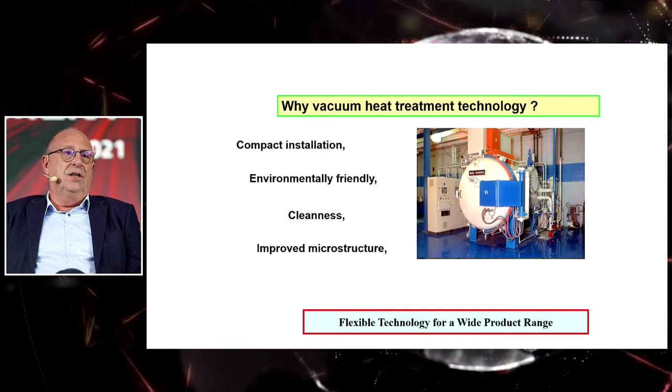First, let me try to answer why vacuum heat treatment technology generally. Everyone knows today that vacuum technology offers compact installation, is environmentally friendly, and offers cleanness and improved microstructures. So vacuum technology is generally a good technology for a wide product range. An important part of modern vacuum technology is vacuum or low pressure carburizing. Seco/Warwick developed this technology together with our research team for a long time, maybe the last 20 years or more.

So what is the basic difference between traditional gas carburizing and vacuum carburizing? Traditional gas carburizing is controlled by the carbon potential value. The carburizing gases are supplied from gas generators, and online monitoring systems based on an oxygen probe keep the potential at the required level. This is the critical factor for solving the diffusion equations, so we are able to practically control the development

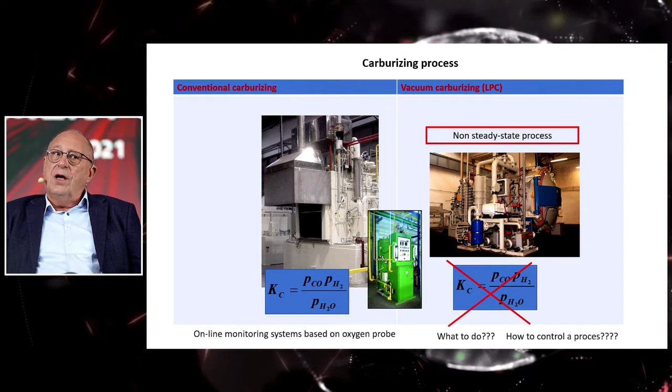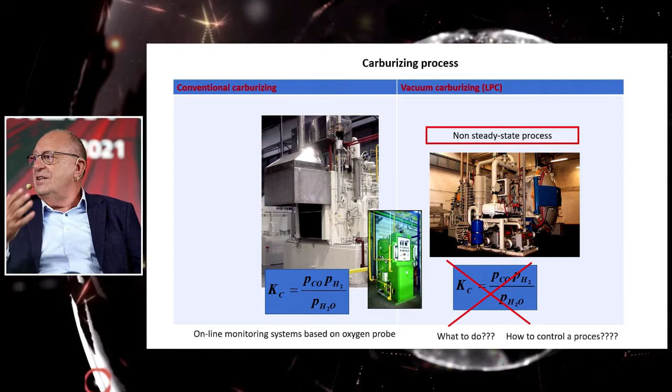of the carbon profile online. Vacuum or low pressure carburizing is generally a non-steady state process, so it's hard to keep and control the equilibrium. The question is what to do. Absolutely, artificial intelligence tools are necessary to foresee and plan the schedule of each vacuum carburizing process.

A few words more about vacuum carburizing to make the process more understandable. Heating to high temperature goes in an inert atmosphere or vacuum, and the carburizing period is divided into several segments: boost and diffusion, rich in carbon, poor or zero carbon. Consequently, the development of the carbon profile goes under non-steady state boundary conditions on the surface, and it is a difficult issue to be solved using traditional methods.

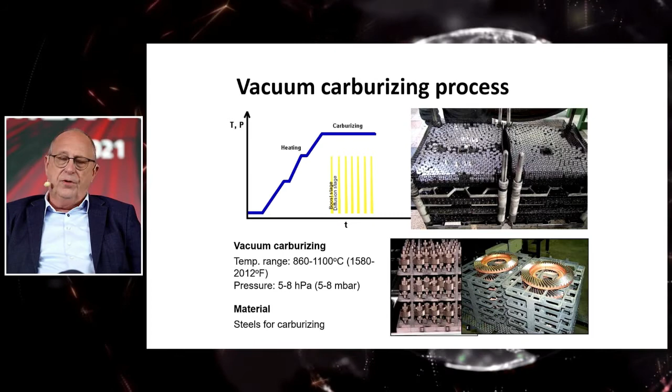Therefore, we built a special algorithm to plan and simulate the development of carbon profiles. For that, we developed an advanced artificial intelligence product. It is called SimVac, Process Simulator, and it consists of two modules. The first one is SimCarb, to simulate the development of the carbon profile during the numerous boost and diffusion stages,

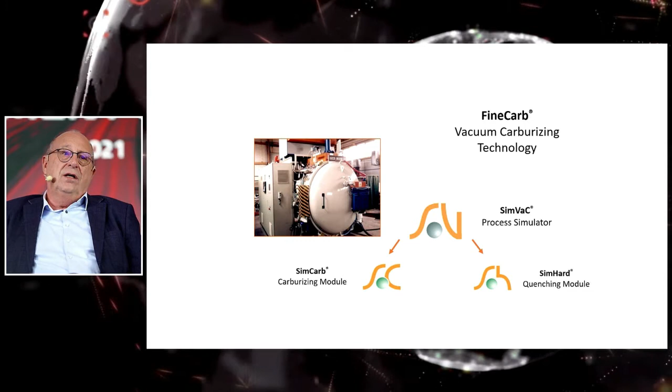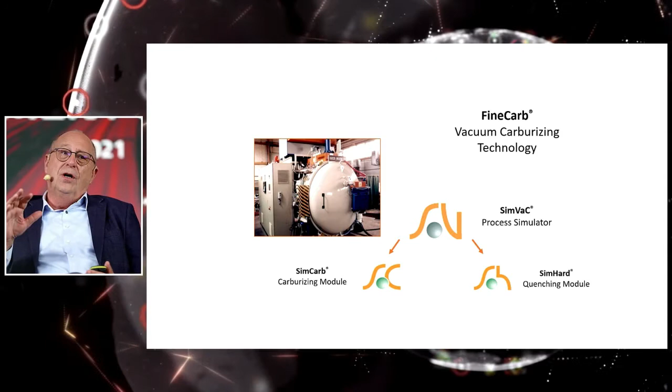and the next stage is SimHard, which is dedicated to simulating the austenite-martensite transformation in the carbon-rich or poor regions to finally reach the hardness profile in the surface layer, in the case. As you can see, it is a very hard numerical challenge for that program.

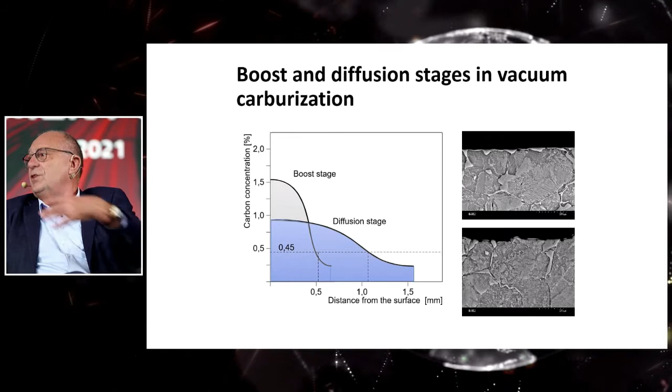Because the surface concentration changes continuously during the process, we have a lot of phenomena which we should take into account when processing this algorithm. So the first issue was the development of a real physical model of vacuum carburizing. It should take into account dividing the process into saturation and diffusion stages. It should additionally include the phenomenon of soot, carbon deposit.

Also, carbide formation and dissolution is taken into account. The program is very clever, and it's also able to take into account the effect of item geometry, for example, different curvatures of details. It also knows the effect of alloy additives in carburizing steel. Therefore, in my opinion, it is a very, very clever artificial intelligence tool which contains the knowledge of several generations of heat treaters inside.

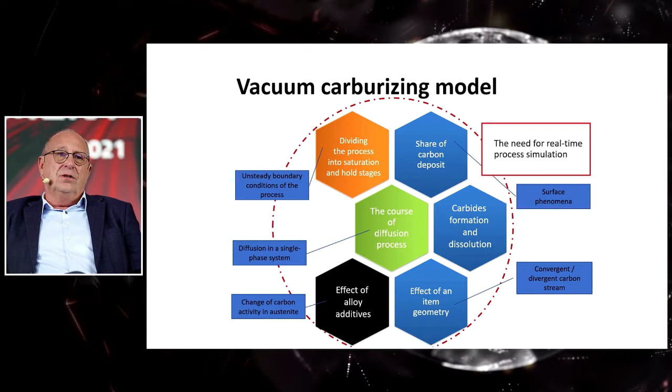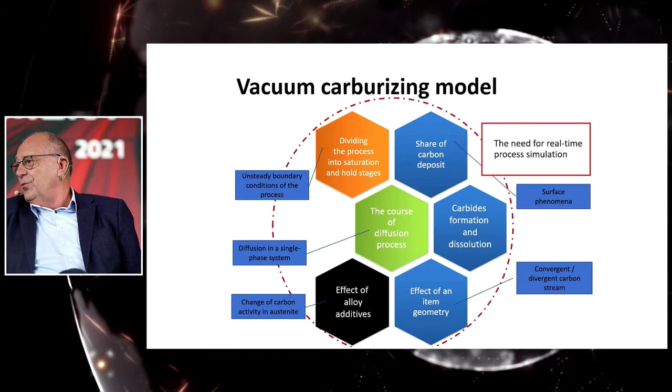So, the very important thing is that the program works in real time. We don't have to wait a long time for the solution like at traditional FEM or computer fluid dynamics programs. It works really very fast.

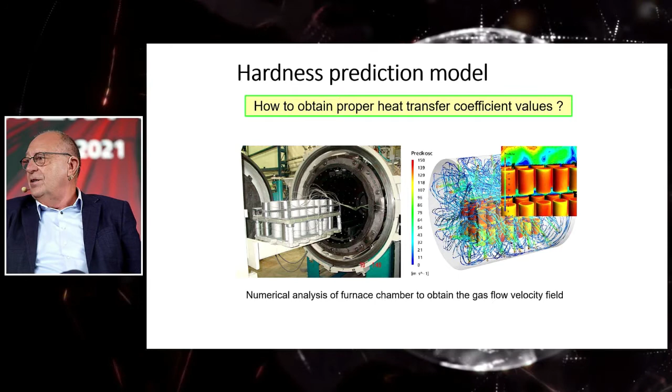So, what were the challenges during the development of the SimVac process? The first and very important was to obtain the proper heat transfer coefficient values in high pressure gas quench furnaces. The first approach we did using the conventional computer fluid dynamics programs. So the first approach was the estimation of the chilling rate and heat transfer coefficient for the dedicated furnaces at dedicated pressures of inert gas, and then all this data has been confirmed by numerous experiments. So we are really very sure that this data describes very well the real phenomena inside of the vacuum chamber.

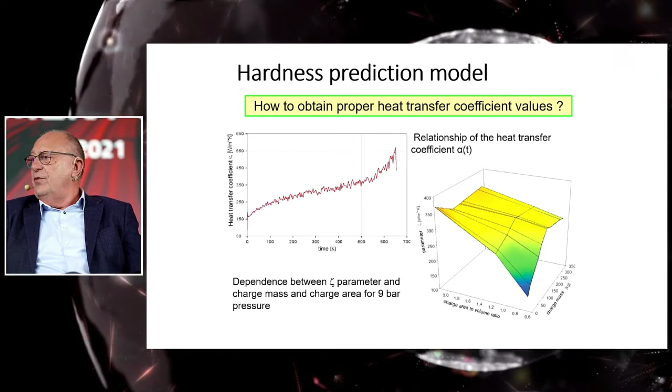So finally, we described the relationships between heat transfer coefficients versus time for the fixed pressure of inert gas, and we introduced into the memory of this program this three-dimensional relationship of average heat transfer coefficient, the mass of charge, and the shape and area of charge, and these two values describe very well the efficiency of heat transfer.

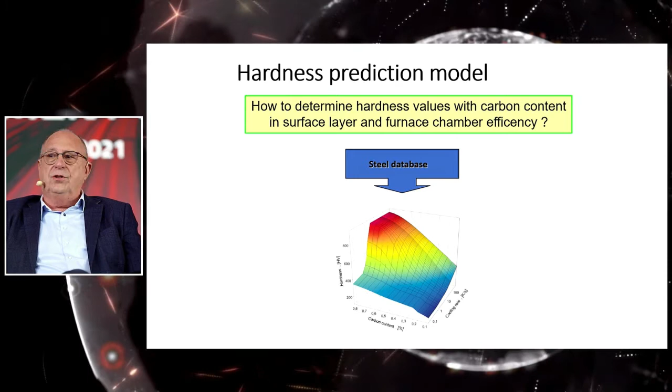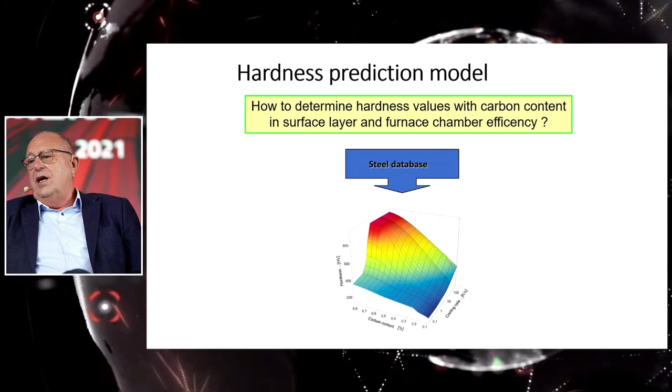The next important relationships are the digital CCT diagrams, continuous cooling diagrams. So we are able to foresee the efficiency of austenite-martensite or austenite-bainite transformations at the stage of high pressure gas quenching.

So finally, the program is very nice. It's very suitable for lab staff. So the operator introduces into the program only the surface layer requirements, details of geometry, mass and area of charge, cooling gas properties. We use furnace chamber cooling efficiency, and the program's memory is processing the following relations: hardness versus carbon content and cooling rate.

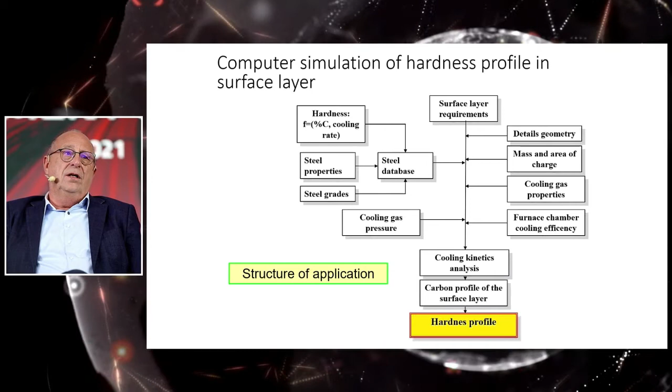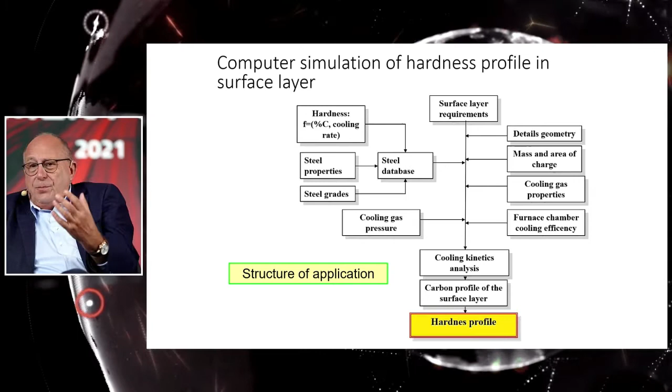It introduces the additional modifications from the steel database, and the cooling gas pressure we choose also, and the program automatically analyzes the cooling kinetics and carbon profile in the surface layer. So finally it offers the necessary hardness profile, and this is the goal in the heat treatment, especially for low pressure carburizing.

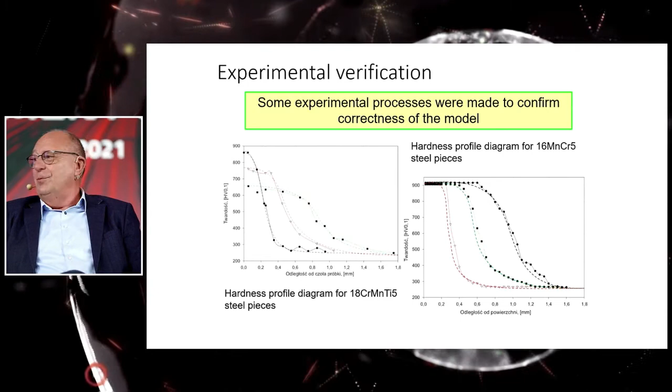So as you can see, the accuracy of this program is very close. You can see the comparison of simulation results and experimental results. Both these curves are very close together, so it confirms the good reliability of this SimVac SimCarb program.

So the next functionality of the SimVac program is the special dedication for gears. Gears are the important group of low pressure carburized cases. So the program helps us to simulate the differences in the carbon profiles along the tooth profile. It is a very critical factor, especially for very important customers. They expect homogeneous thickness, homogeneous hardness on a whole tooth. Of course, it is impossible, but this program helps us to find the compromise between the hardnesses, between the thicknesses of this case.

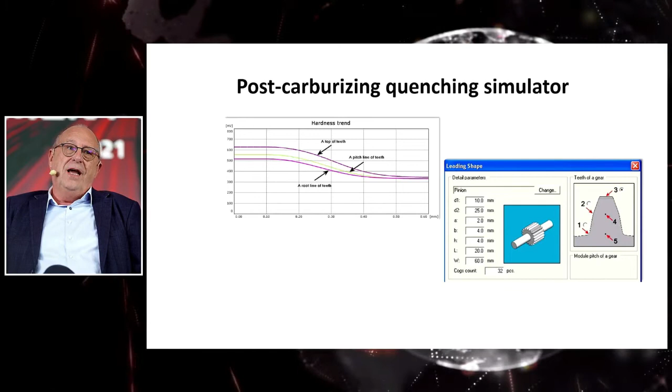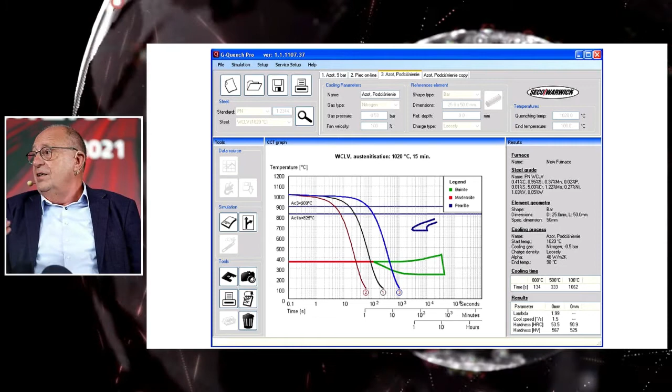So the achievements in the heat transfer efficiency enabled us to develop the next artificial intelligence tool, namely the G-Quench Pro software. This G-Quench Pro software is dedicated especially for high alloyed steels, die steels, high-speed steels, generally tool steels, and especially dedicated for large products like dies for forging, dies for forming, for injection casting, for injection of plastic. These are usually very massive parts.

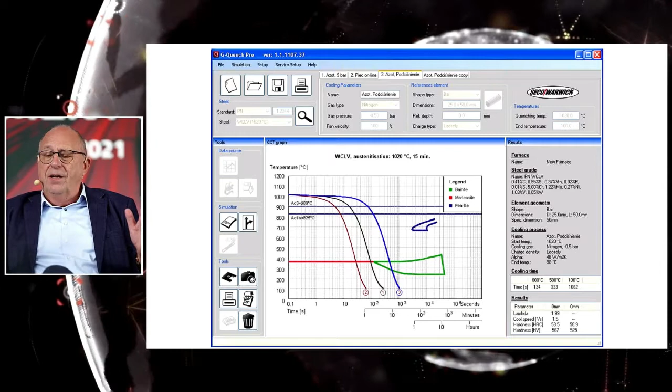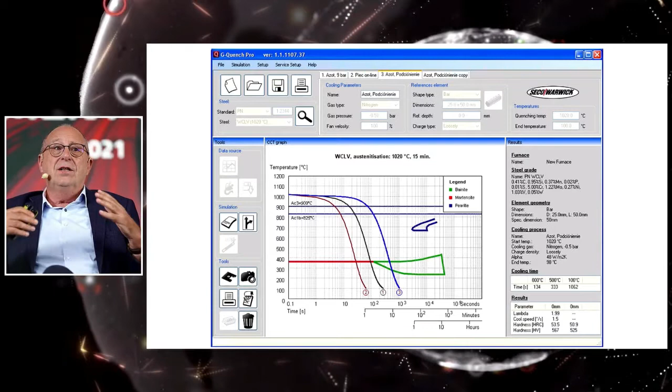It's hard to foresee the proper chilling rate, the cooling rate, and its effect on the final microstructure. The program contains a lot of data inside. It contains the CCT diagrams for practically all tool steels, and it is a valuable support tool to control the difficult technological process, the quenching of large-scale, high-alloyed steel dies.

So the next step in our thinking was continuing this issue, namely, if we are able to quench the large die properly. So, as you can see, quenching. The next stage should usually be tempering, single, double or triple tempering. The question was why not replace the second tempering by nitriding, which would be carried out in the same chamber without discharging the furnace. And of course, we developed the low pressure nitriding technology as an additional option for that process.

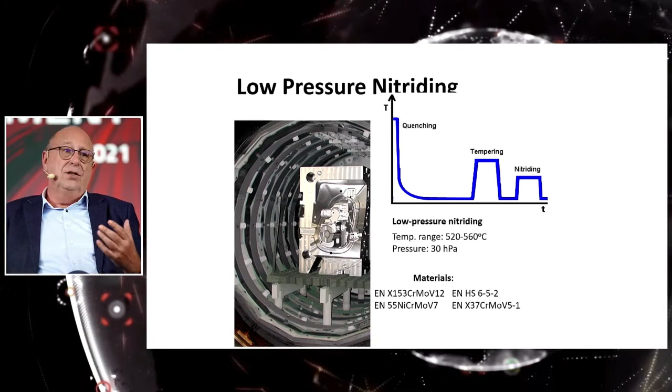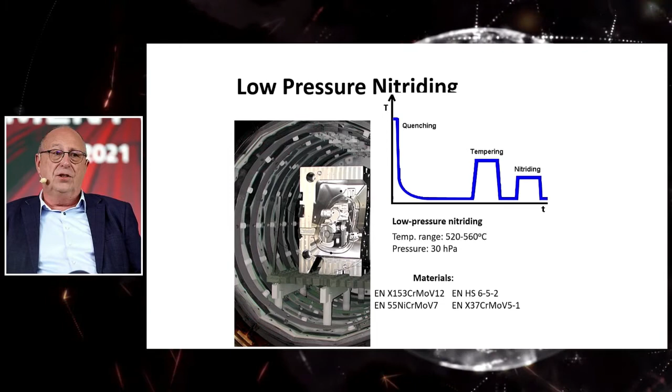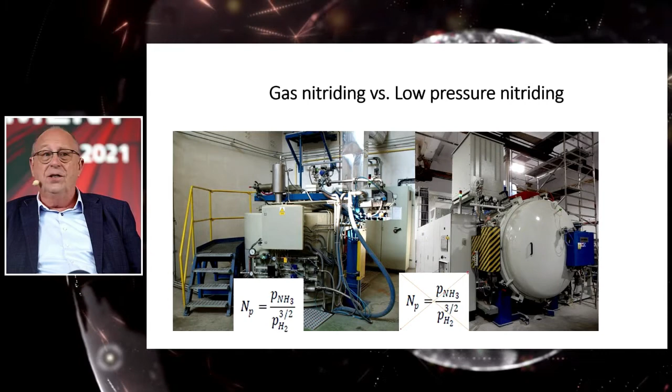And together with our team, especially together with Professor Korecka, we developed the software, CLPN software, that helps us to foresee the proper parameters to reach the necessary microstructure of the nitrided layer in the surface, especially nitrided layers free of the white nitride zone. So, of course, this program also was a great challenge, because also in this case the nitrogen potential widely used for nitriding technology is not descriptive for that process.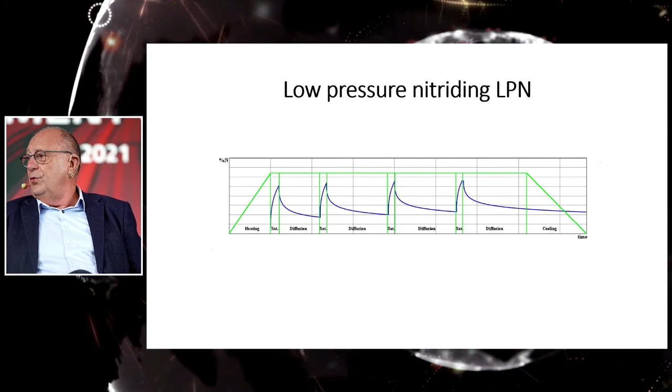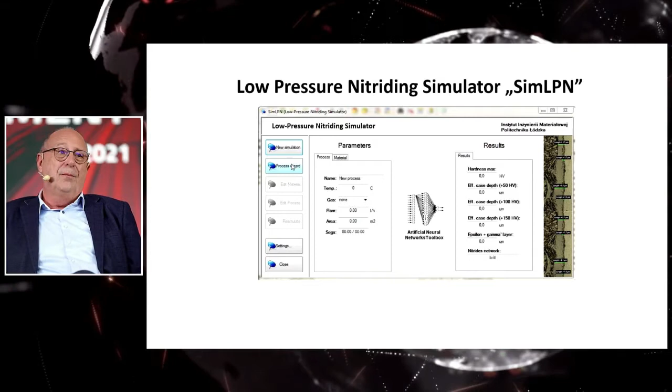So also here the process must be divided into the boost and diffusion stage, rich in nitrogen and poor in nitrogen. But compared to carburizing, the problem is more difficult, because it is not one-phase diffusion. There are several factors which influence the development of the nitrogen profile and microstructure. Therefore, our proposal was to apply a neural network to solve this problem, and to teach this neural network on a very large experimental base.

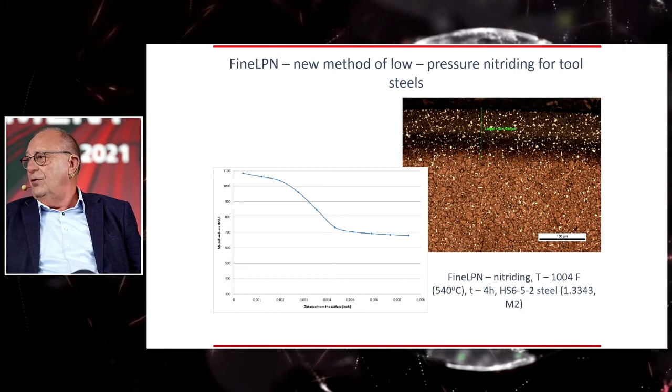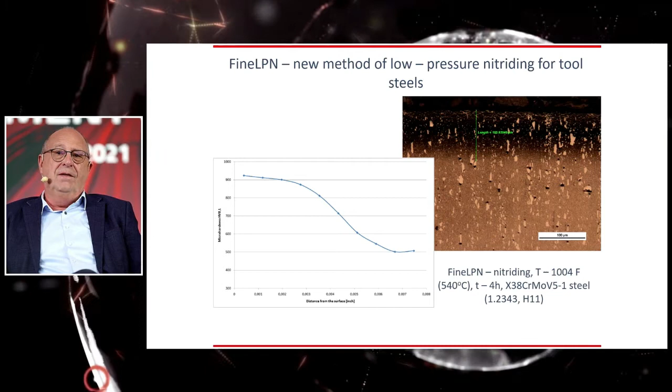So results are visible here. We are able to reach the proper microstructure. Only the dark layer without any traces of nitrides on the surface on high-speed steels, like here, M2 steel, on the H11 steel, like here, and a very nice hardness profile obtained in this technology, and finally also on the D2 steel. No nitrides on the surface, only dark layer.

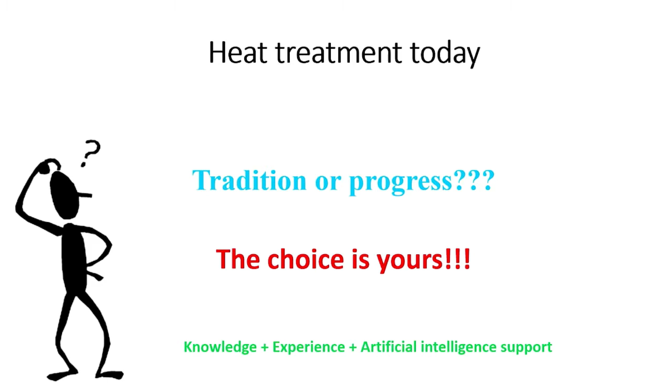So, summarizing, the answer to your question was not so short. This is the answer to the question: tradition or progress. Of course, the choice is also yours. The choice belongs to the customers. But in my opinion, the knowledge of customers plus experience may be very well supported by artificial intelligence. The present and offered artificial intelligence tools contain the knowledge of generations.

Well, that's really interesting. To me, it sounds a little bit like a sound of the future, but it appears that it has been available on the market for many, many years, and it has a proven track record in industry, right? Yes, that's right. Absolutely so. That's a remarkable thing. Thank you very much, Professor.

Thank you. Another question to Dr. Wołowiec-Korecka. You are one of the creators of SimCarb, right? Right. And somehow in your everyday work, you combine two worlds. On one hand, software engineering. On the other hand, material engineering. That's correct. Every software has got an algorithm inside. So please tell me, what's the difference between the algorithmist and the programmer? Oh, it's a good question.

And I answer referring to Polish legal status. In the Polish classification of professions, there are several groups of IT professions, including group number 251 called computer system analysts and IT programmers. And this group includes the programmer profession as well as designer of ICT systems, who we can call algorithmist. Okay.

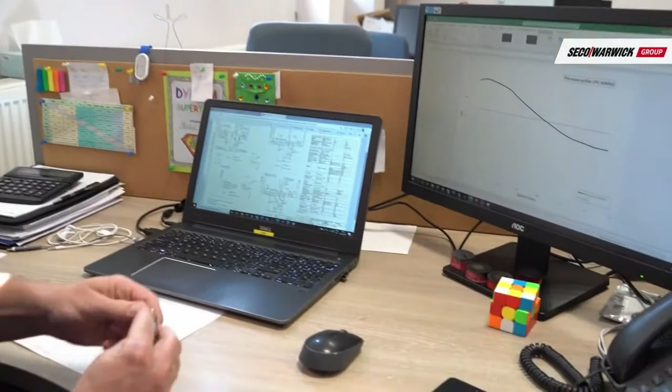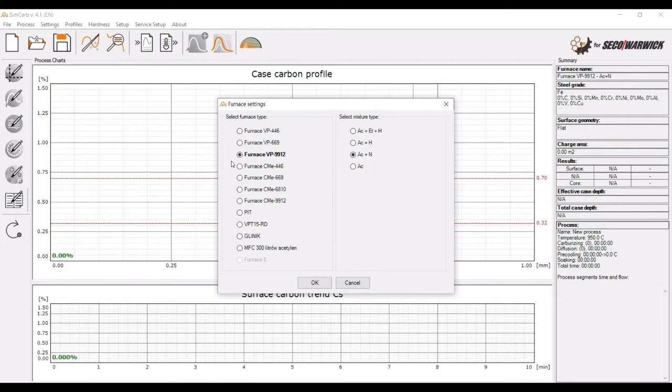Okay, now I'm sitting in front of my laptop in the office, and I will show you in several steps how to use the SimCarb simulator to create the most important parameters for an LPC recipe. So first of all is to be 100% sure that the furnace which will finally do the recipe is the same as in the SimCarb simulator. So I check it right now, and for my simulation and for my recipe I use furnace name VP446, and the mixture will consist of acetylene, ethylene and hydrogen.

Next is to use one of these icons. This is the process wizard. This is the process optimizer. The process wizard is dedicated for more advanced people. The process optimizer is dedicated for the beginner. I will use the process wizard. Okay, next step is to give a name for the process.

Next is to choose the temperature, then the data after carburizing, I mean pre-cooling, the ramp of pre-cooling, final temperature for pre-cooling and soaking time. And other parameters are pairs of carburizing and diffusion and their times.

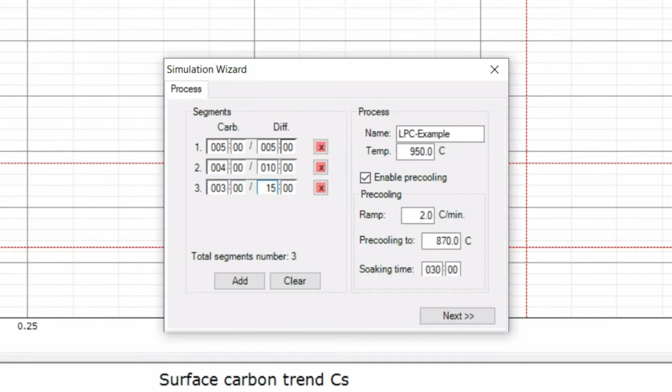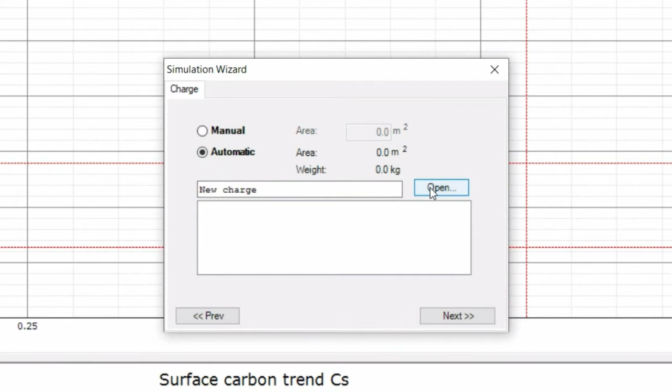Okay, click next, and now I choose a steel. Next is the geometry, cylinder, external surface, a number of radius. Next, basic information about the charge area. I will use the automatic system or window to calculate my active area. That's the parameters for my example of a single piece, the quantity, and once again material. Okay, summary information about the charge. Okay, next, and the simulation is ready to be run.

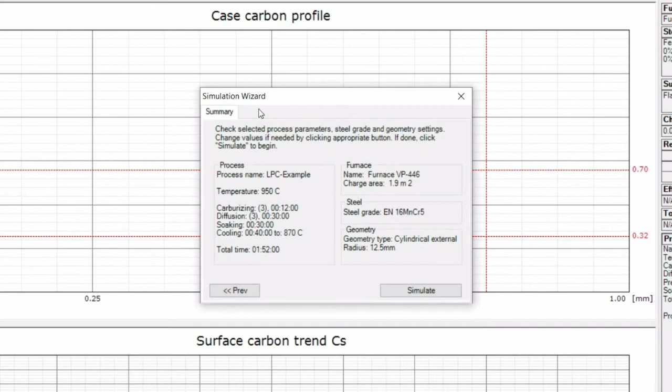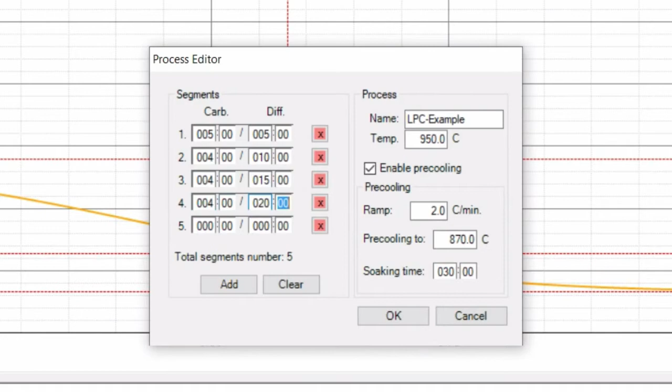Here we go, the curve of carbon. This looks not perfect, so I decided to do some modification using this icon. Process editor, everything can be modified. So I decided to add an extra 2 pairs for carburizing and diffusion, and I do this. Okay, click this button and do the resimulation. Very well. So now the curve of carbon looks much better.

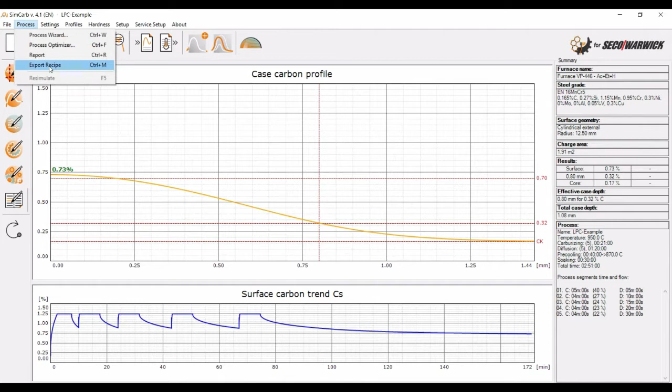And so the last thing is to save the file which will be implemented to the recipe on the furnace. Okay, so the main part of the low pressure carburizing process is ready. Now I will implement it into the recipe.

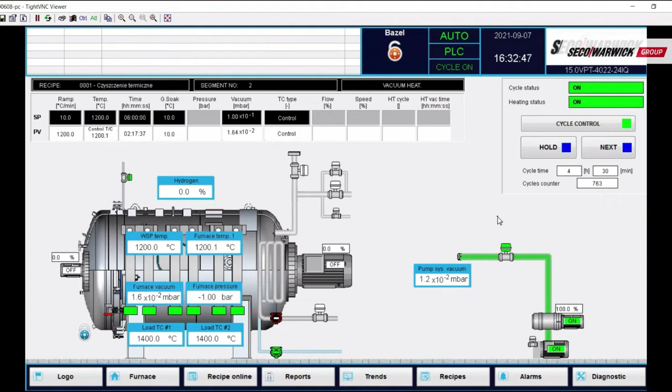So now I'm standing in front of the furnace computer, and I will implement data from the SIMVAC simulator into the recipe. So what I will do, find the recipe, click edit, and here we have the almost ready low pressure carburizing recipe. Almost ready means that we have pumping, gas heating and partial pressure heating, the segments for the beginning, and the blower cooling, the segments after carburizing.

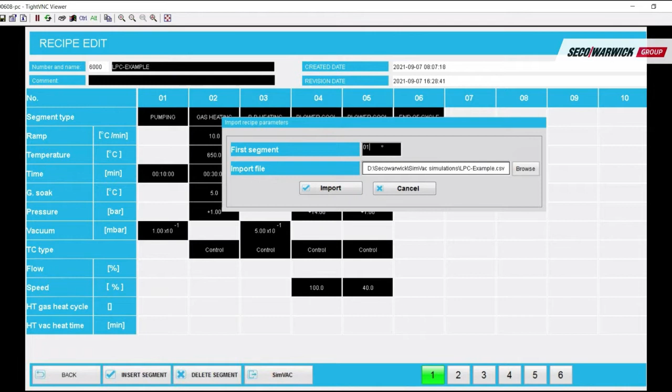Now I will implement the data from the simulator. I click this icon, find the proper file, click open, and then choose the right position. Import. Here we go, everything is correct.

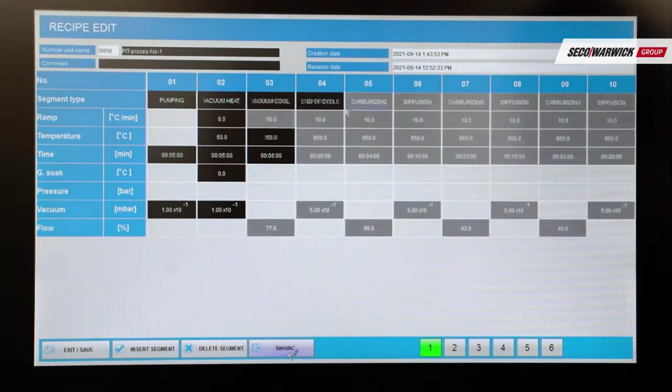We heard a lot about SIMVAC, but there is also G-quench. What's the difference between SIMVAC and G-quench, and how does it work? The name G-quench is an abbreviation of the words gas quenching simulator. So it's dedicated to simulate and control the hardening of tool steels in gas, also under high pressure. It reduces the need for testing processes. So it does not include carburizing technology, only quenching technology.

During calculation, the process is simulated according to parameters defined by the user. The direct result is determination of the cooling curve for a selected material under cooling conditions. In combination with built-in digitized cooling transformation graphs, the curve provides information about the material's phases during processing. The final effect of the simulation is to determine the expected final hardness of the material.

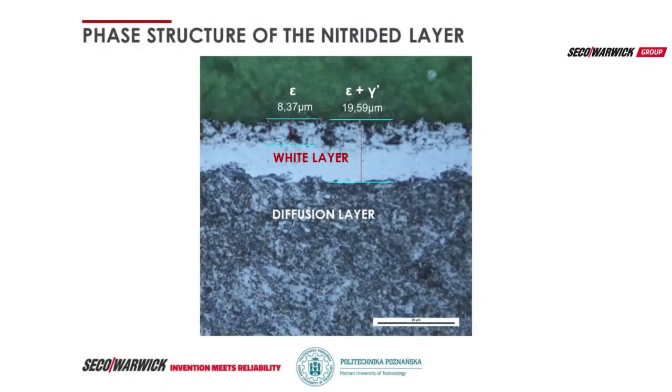The created diffusion layer, depending on nitriding potential, can consist of epsilon, gamma prime, and alpha phase. During nitriding processes at high temperatures reaching between 490 and 560 degrees Celsius, ammonia, when in contact with metal surfaces, decomposes into nitrogen and hydrogen. As a result of those reactions, the atmosphere in the furnace consists of ammonia, hydrogen, and nitrogen.

Other parameters that determine the kinetics of growth of the nitrided layer, so its pace of growth and phase structure, are temperature and nitriding potential. Nitriding potential is a quotient of the partial pressures of NH3 and H2. Zero-flow nitriding technology is a result of lifelong research on the thermodynamics and kinetics of nitriding by Professor Leszek Małdziński. Its industrial version, however, is a joint success of teams from Poznań University of Technology and Seco Warwick from Świebodzin.

Zero flow is the most advanced and yet most simple in operation controlled gas nitriding method. It relies solely on using ammonia gas throughout the whole process. The flow of ammonia is periodically reduced to zero, which enables precise control of nitriding potential and formation of designated layers.

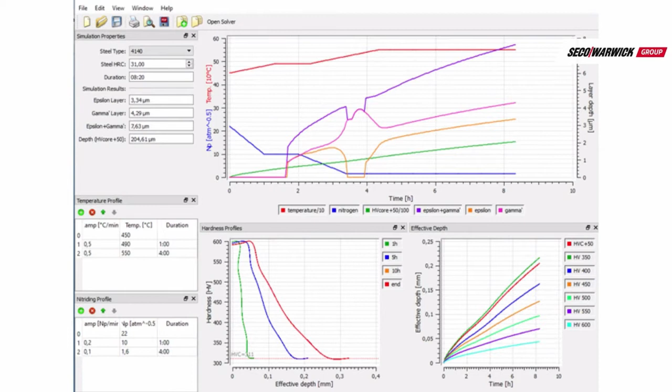Offline Simulator is computer software based on thermo-chemical and kinetic equations, as well as experimental research describing the speed of growth and phase structure of the nitrided layer as functions of temperature, nitriding potential, and time. The simulator determines values of those parameters that will result in obtaining designated layers. In the offline simulator software, there's a possibility of setting process parameters by hand. Simulation results are presented as values of thickness of the nitrided layer, as well as graphs showing the change of parameters and layer thickness throughout the process time.

The weak spot of the offline simulator lies in arbitrarily set values of heat-up speed of the retort and pace of nitriding potential reduction that may be different from their real values. These depend on multiple factors such as the furnace's heating power, weight and surface of the load, and catalytic activity of the retort surface, all of which are hard to determine.

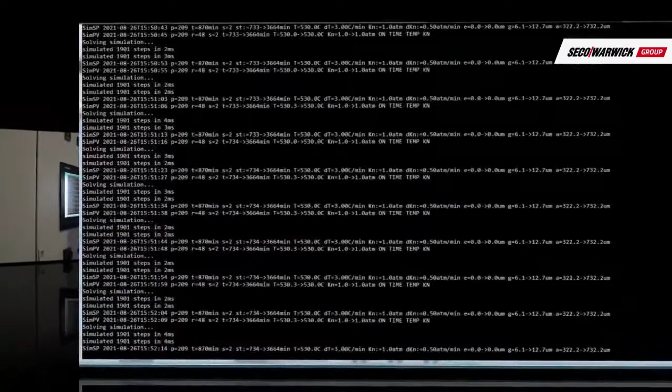Online Simulator is an offline simulator installed in the furnace's software that controls the nitriding process based on feedback control. It calculates growth of the nitrided layer based on real nitriding parameters and adjusts them in such a manner as to achieve the desired phase structure and thickness of occurring phases.

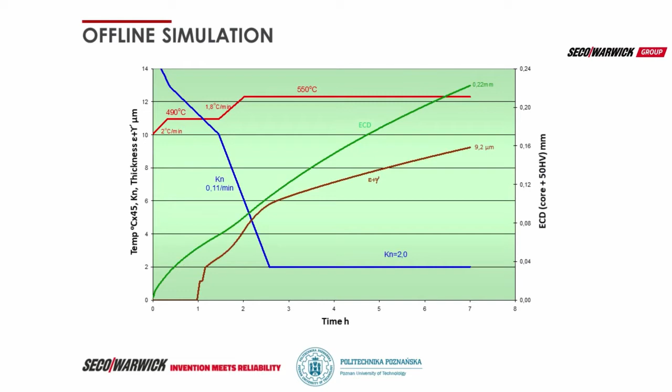This graph depicts a simulation of a process with arbitrarily set values of temperature, which for the first stage is 490 degrees Celsius and for the second stage 550 degrees Celsius. Heat-up speed to the first stage temperature is 2 degrees Celsius per minute and to the second stage temperature 1.8 degrees Celsius per minute. Nitriding potential in the first stage equals 10 and in the second stage equals 2. Speed of reduction of nitriding potential from the first to second stage value was set to 0.11 per minute.

As a result, a layer consisting of epsilon and gamma prime with a thickness of 9.2 micrometers and a diffusion zone of 0.22 millimeters was achieved. Time of process calculated from 450 degrees Celsius, so from the beginning of calculations until acquiring the desired layer, was 7 hours.

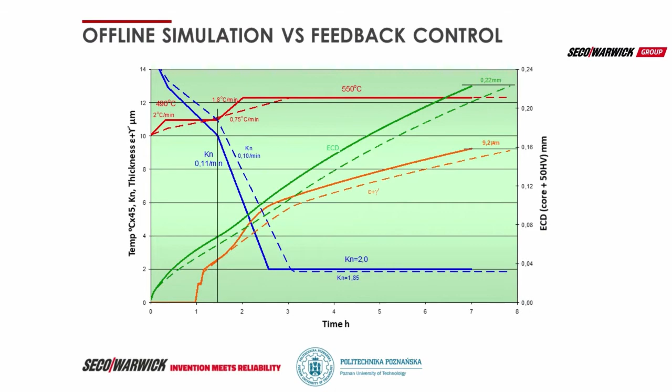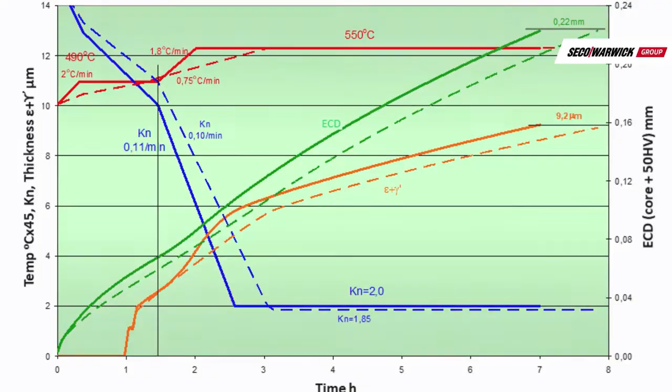This graph shows a comparison between the simulation mentioned before and a process with lower speed of heating up and potential reduction. Presented on the graph as dotted lines are real values of temperature and nitriding potential. With lower speed of load heat-up and slower potential reduction, the growth of the diffusive layer is also slower. In order to receive exactly an identical layer, its thickness, structure and effective depth, the time of the second nitriding stage was longer by 50 minutes and nitriding potential was reduced from 2.0 to 1.85.

We have seen zero flow feedback control in action. Professor Kula, do you think that in the nearest future such kind of control system will be used commonly in the heat treatment world? I think yes. The zero flow process is the advanced kind of gas nitriding technology. Therefore, it is describable by nitrogen potential. So we are able to use both approaches to the monitoring, namely the offline and online.

Offline is very good for the first approach of process parameters establishment. Online is very good to control the flow of the process. So it takes into account both the proper behavior of equipment and also the risks. If we have a problem with the process, we are able also to improve the flow of the process to make the necessary corrections. So, in my opinion, this type of software is very valuable for future applications.

Okay, thank you very much. During this panel, we've got also one more algorithm to discuss, and that is coil annealing 4.0. Sometimes one picture is better than 1,000 words, so let's start from the video.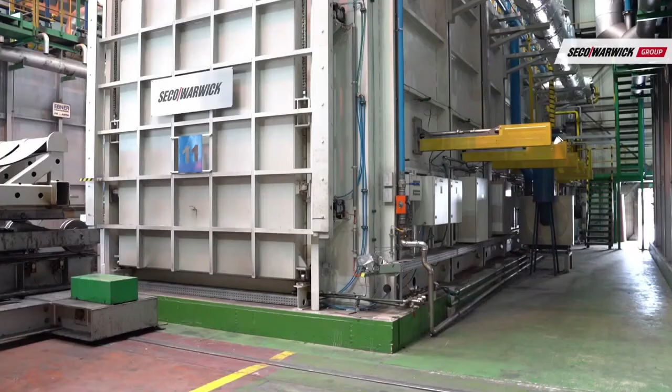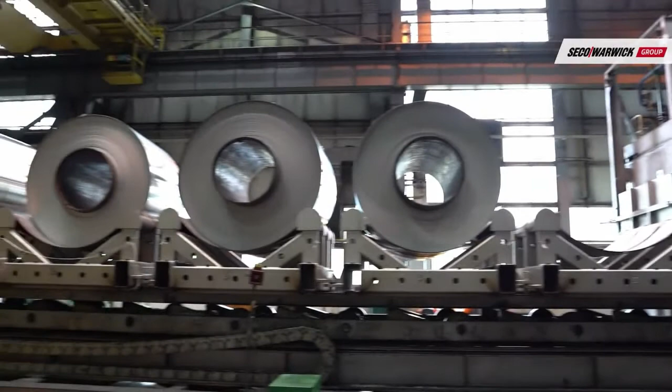One of the key branches for the development of the world economy is production of aluminum, which consists of a number of stages, including heat treatment carried out with the use of industrial furnaces. SECO/WARWICK is a global manufacturer of furnaces for heat treatment of aluminum, including vortex furnaces, in which intermediate or final heat treatment of loads in the form of coils or foil coils made of aluminum and its alloys is carried out. In particular, stress relief and recrystallization annealing.

Stress relief annealing is used when the material has lost its ability to deform due to rolling and the process has not yet been completed. As a result of stress relief annealing, there is a gradual, continuous disappearance of the deformation of the crystal lattice caused by the strain. As a result of recrystallization annealing, new grains are formed with an undistorted crystal lattice, as a result of which the tensile strength of the material reaches the minimum value and the elongation the maximum one. Full recrystallization of the material completely removes the effects of cold work.

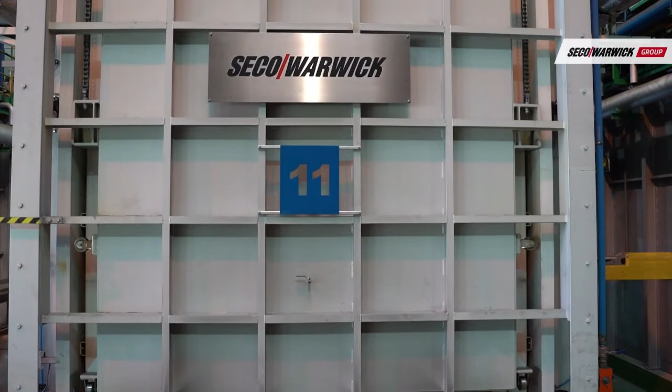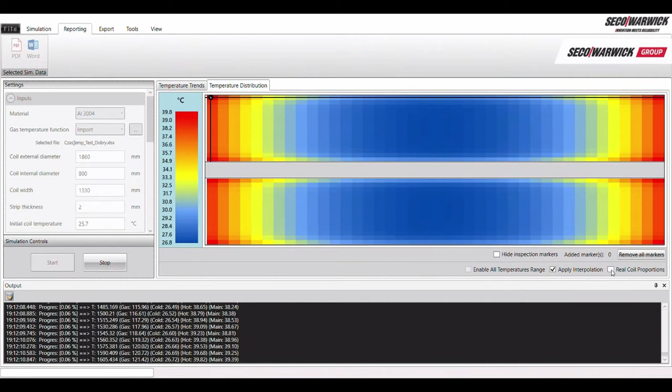In order to fully and continuously control the above-mentioned processes, it is necessary to know the temperature field in the section of the heated coil. For this purpose, SECO/WARWICK has developed a system called SeCoil dedicated to the vortex furnace line, which is a part of the Industry 4.0 concept. SeCoil is a set of tools for the design, optimization and control of the heating process of aluminum coils. The main element of the SeCoil system is a mathematical model of batch heating, which enables the determination of the temperature field in the cross-section of the coil at any time in the process without the need to use load thermocouples.

The mathematical model can be used both for process simulation and design, as well as real-time process control. The mathematical model as an online controller, in cooperation with the primary system of the furnace, simulates the current temperature field in the cross-section of the coil using information on the current conditions in the furnace's heating chamber and the parameters of the heated coil. SeCoil allows you to choose the location of the so-called virtual control thermocouples, the indications of which can be used to control and regulate the process.

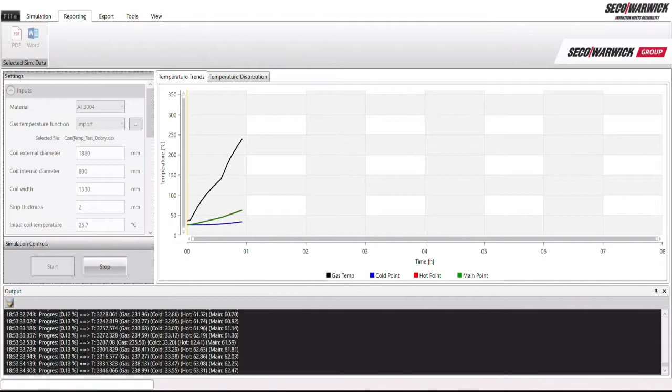The screen shows the real-time coil heating curves. The black line shows the temperature of the furnace heating chamber measured by the regulating thermocouple. The red line, the highest temperature of the coil determined by the simulator. The blue line, the lowest temperature of the coil determined by the simulator, while the green line, the temperature indicated by the so-called virtual control thermocouple.

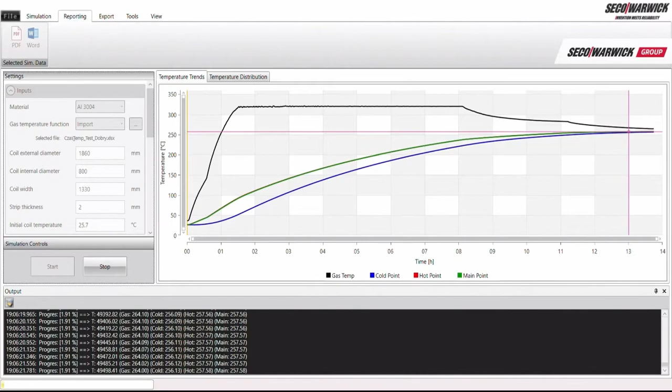The task of the automatic regulation and control system is to maintain a certain temperature excess in the heating chamber until the appropriate, safe temperature is reached at the virtual measurement point, and then to lower the temperature of the heating chamber according to a strictly defined relationship. Thanks to the applied procedure, it is possible to obtain the shortest possible process time without the risk of overheating the coil.

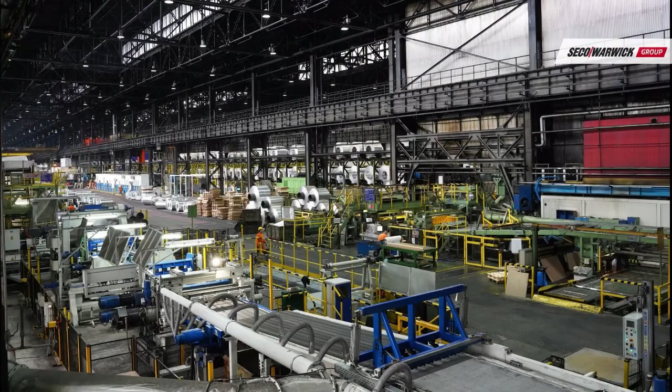The following advantages of the SeCoil system can be mentioned. No need to use and service load thermocouples. Any choice of the location of the so-called virtual control thermocouples. The possibility of archiving data about the temperature field of each processed coil in the cloud. Possibility to optimize process time and energy consumption.

Dr. Korpała, you are one of the creators of SeCoil coil annealing 4.0, is that correct? Yes. And for your everyday job, you are dealing with modeling physical phenomena in metal manufacturing. I need to write that down because this is a tongue-breaking sentence for me. Understood.

For the process, a lot of parameters are quite crucial, right? Please tell me why the information about the annealing coil temperature field during the annealing process is so important.

Yeah, this video has already answered most of those questions, but the main part is, let me explain why we do annealing first of all. As you have seen, we have a very clear surface of these coils of this material, aluminium, with different alloy types, and those alloys are cold rolled to this form. So we have a rolled coil of different thicknesses of those strips.